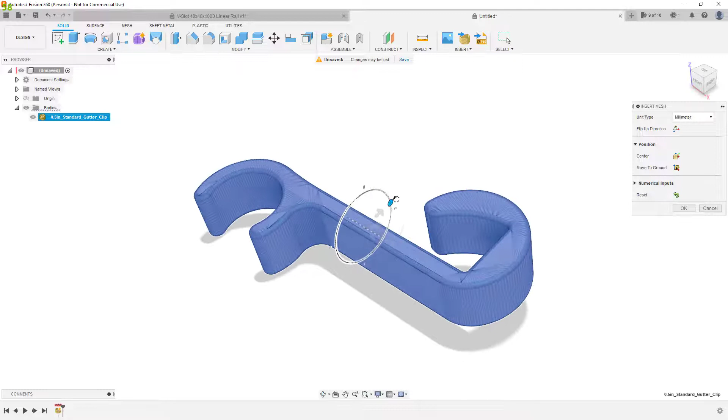Advanced tip, we're going to CNC this, so I'm just going to lay this flat real quick. Other than that, we don't really need to worry about its orientation.

From here, obviously you've got a bunch of faces, but what I found is that if you go into the mesh tab and generate face groups, select your model and hit OK, it's going to blink for a moment and do its thing. Now we're going to go in and convert it, which is this one here.

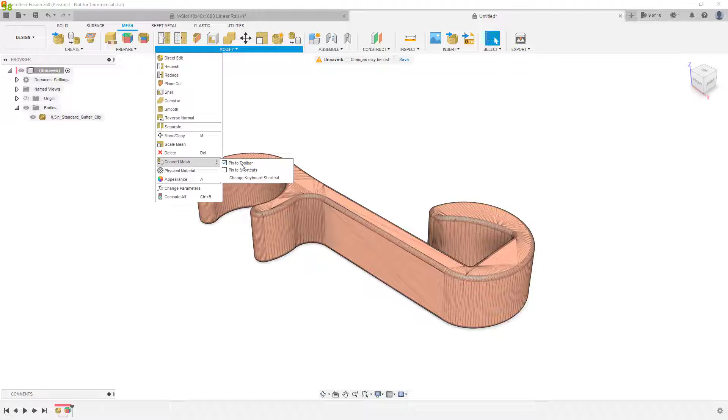Now you might not have convert here. You may have to go down to modify and choose convert mesh, but I use that all the time, so I just hit these three dots and pin it to the toolbar, so it's right here for me. I'll click this one to convert the mesh and accept it.

There's a lot of stuff we could do here, but we don't really care about all those different things. What you really want is to get the profile of this outline. There's many ways to do it, people have all kinds of recommendations, but this is just how I would do it.

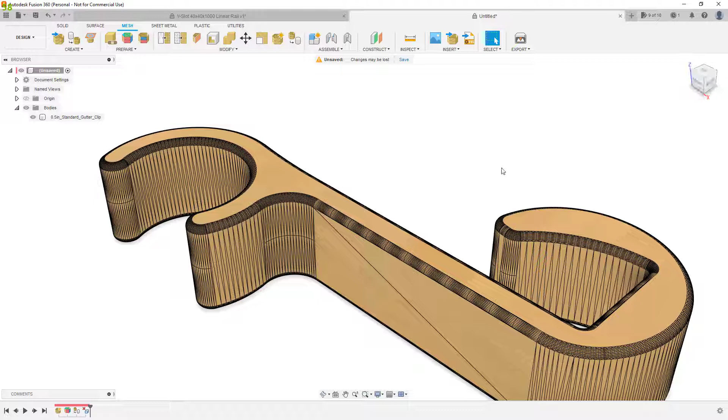Now for me, we are finished with that mesh tab. I could easily get this outline, but I'm assuming you want to identify the actual width of this, which is going to include this little curve here. Like you mentioned, going through deleting all these things is a real pain in the arse.

So what I'll do is I'll go into create an offset plane. Just clicking the button will give you an offset plane. There's all types of planes, but I'll just create an offset plane. Go about here, we're going to go minus about 2 millimeters. That's going to create the offset plane for us now.

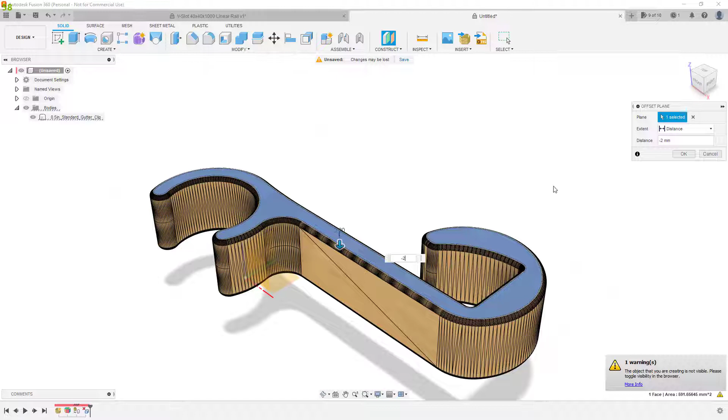I believe the reason you can't see it is because I turned my construction planes off. You probably won't have that issue, but once I'm done with it, I like to turn the eyeball off so I can't see it. But here you have a construction plane, you can see that it is down past those curves.

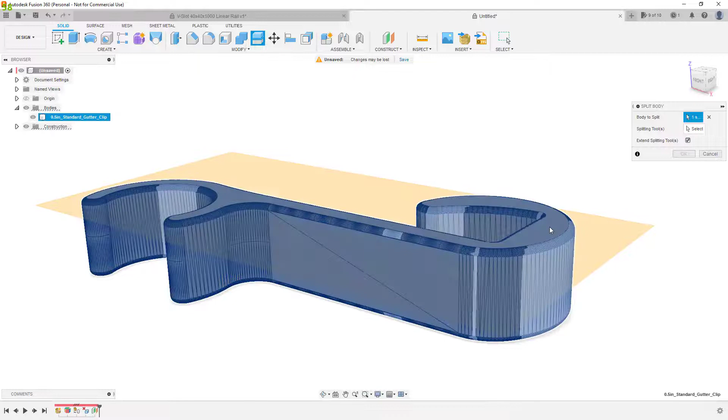At this point, I'll then split the body. So I'm going to choose split body, pick the body that I want to split, and then pick my splitting tool, which is that offset plane, and we have our next step.

Now this is going to create two different pieces because we split the body. I'm going to remove this top piece just to make it easy, and then I'm going to hide this construction plane, and we're left with this piece here.

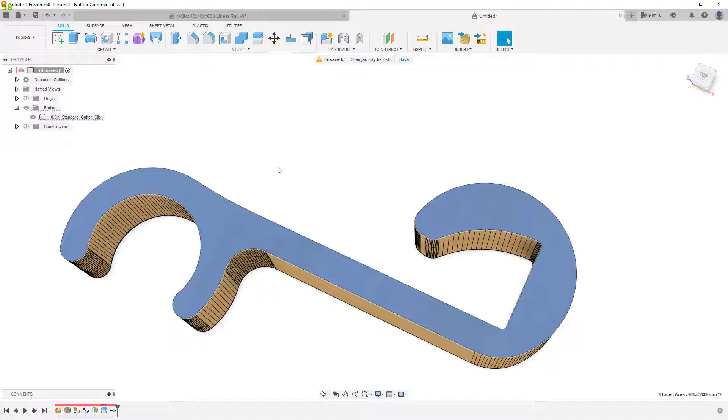Now again, as mentioned, there's 1,000 ways to do it. So how I'm going to do it is just click on this little sketch button here, create sketch, and I'm essentially going to use project.

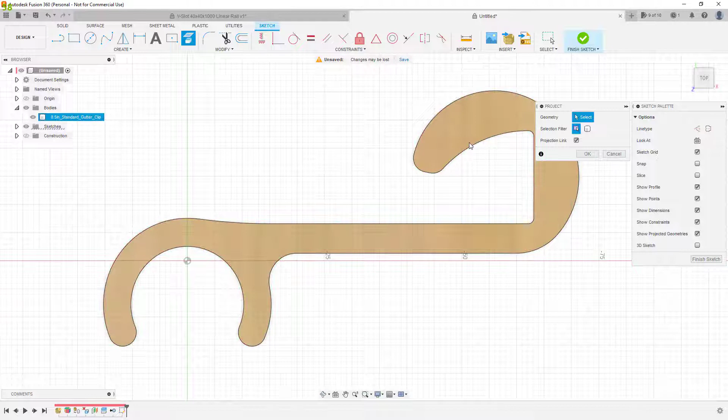Similar, I use project all the time, so you may have to go here to create, choose project, hover, hit the three dots and pin it to the toolbar, but mine's here. I can click an individual line to project that line, but I want to project the entire outline, so I'm just going to click in the middle here, and we'll say okay.

We'll finish that sketch, and now if we hide the body, we are left with just our sketch, and we have the appropriate outline, if you will. Now from here, because it's Fusion 360, you want to have essentially a 3D model.

The SVG is good for other things, and hey, maybe SVG DXF files work in Fusion 360, but I just don't know that, so that's not the route that I go.

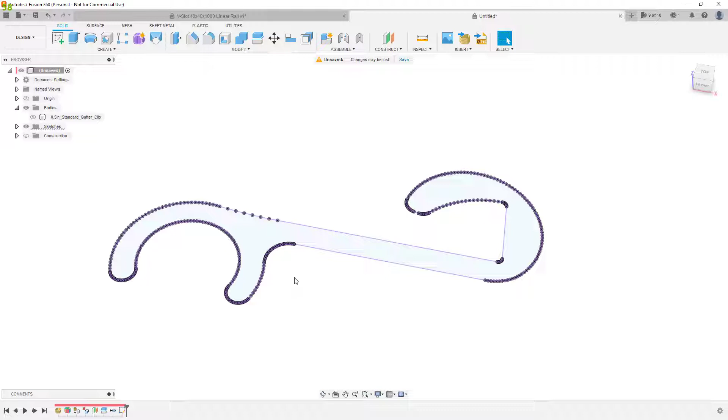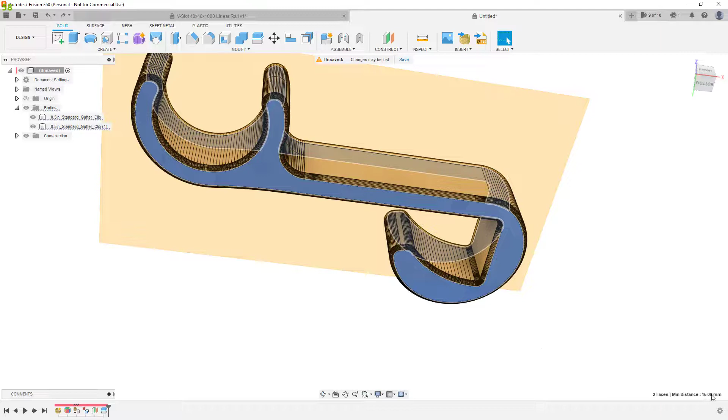I usually use a 3D model to get my heights and other things set. Now that I have my outline, I'm going to extrude this to the thickness of my final part. When I did a test earlier, before splitting this, I selected the top surface, held Control, clicked the bottom surface, and it gave me 15 millimeters as my total thickness. So I'll redo those steps to get back to where we were, and extrude this 15 millimeters, which gives us the body we're looking for without the curves. There are many ways to do this, but this is the easiest and fastest for me.

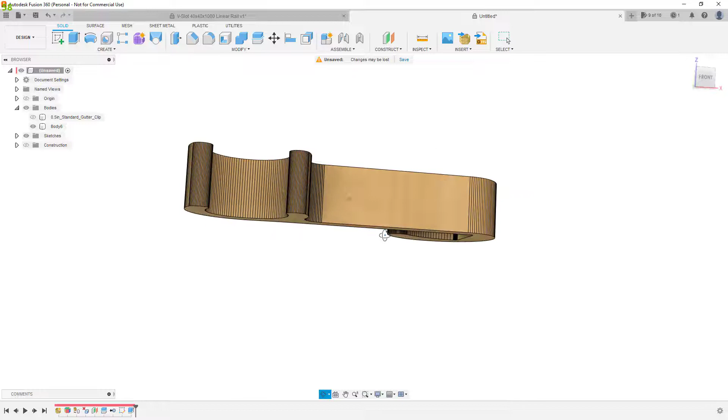So we have our 3D model here. It is laying flat, and we don't have those curved edges, so we're ready to move on to the manufacture workspace. We'll go into manufacture.

The first thing you always have to do is the setup. I've already done this here, so I'll click on setup. You don't have to select a machine, but I went in and added some parameters for my machine, so I'll select that. The box point for my machine is the lower right-hand corner, so I'll choose that. You probably default to the lower left-hand corner for most setups, but I'll use lower right-hand corner for this example.

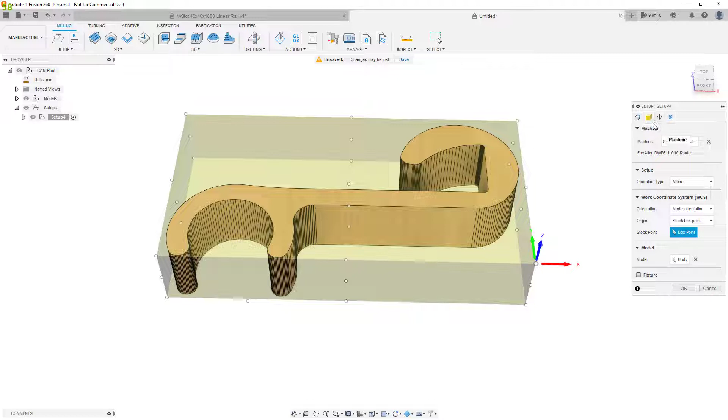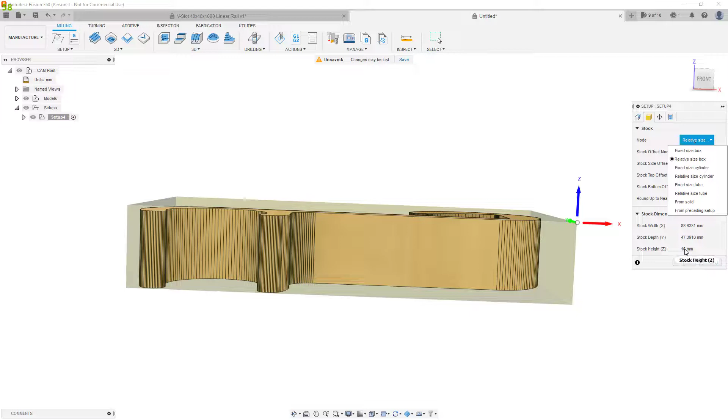Then we'll go into the stock. The stock by default always tries to choose this relative size, which is great for some things, but for me it's not quite what I want. You can see this is a little thicker than our model, right? We have a 15 millimeter model, and theoretically the material we're going to use is also 15 millimeters, so I don't want this 16 millimeters that it chose.

So I'll change this to fixed. Let's say I'm cutting this out of wood, and my piece of wood is 100 millimeters by 100 millimeters. That's my piece of wood there, and it's actually 15 millimeters thick, so I'll set that. You'll see the thickness matches, and the length and width match as well.

Now you see the model is in the center, which may or may not be what you need. If you're trying to save space, you might reconsider. Here you have the model position, and it's always going to be centered because that's what's chosen. Z doesn't matter since it matches the exact thickness of the material, so that's not going to be an issue.

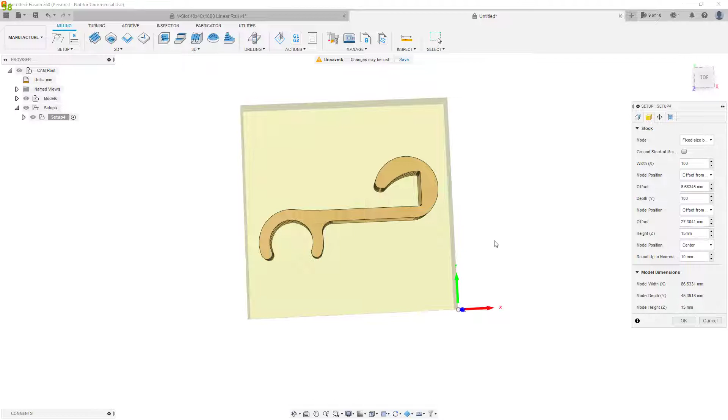For the X and Y offsets, personally I like to go with X plus and Y minus. You can see they're still centered, at 6.6 and 27.3. Now if we take this to 0, it pushes the model all the way to the right side of the stock. And if we put this to 0, it pushes it all the way to the bottom of the stock.

So here I have this remaining stock left. You obviously want to worry about clamps and the thickness of your bit. Typically I don't have this at 0, I have it between 3 and 4. The bit I typically use for these types of things is 3 millimeters thick. I have a couple clamps, so I like to have a little offset off the sides there. That's what I've done.

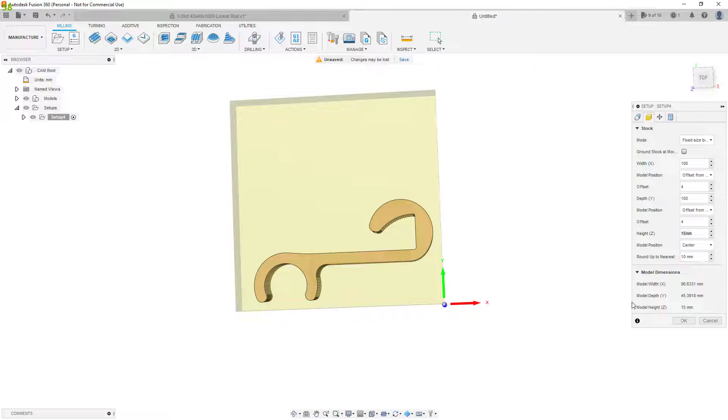Now from here, we're ready to just hit OK. That is our setup. We have determined our stock piece and the position of our model within that stock piece.

This is a pretty straightforward example, so I'm just going to go up here to this 2D contour. We'll select the bottom contour here, and go in and select a tool. I won't go too far into this, but I do use the Amana and the SpeTool databases. There's obviously a lot of tools in both of them.

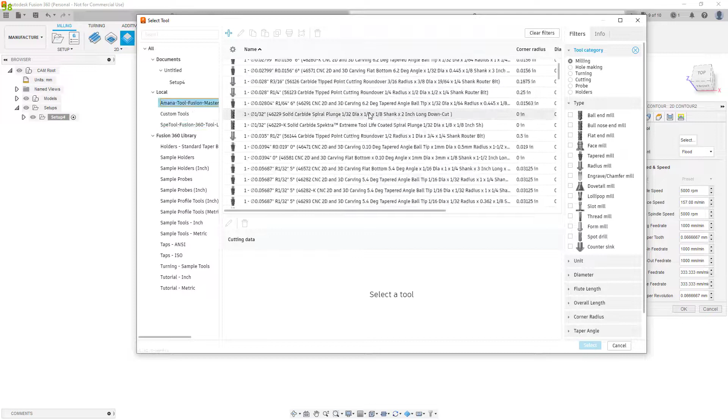Once I find the tool that I've purchased, searching by the number or what have you, I'll copy that tool. Then I'll come over here into my custom tool database that I created. These are essentially all the bits that I own. I don't own the rest of them, so I don't really want access to them, plus it takes forever to find what I need. So now that I've copied that bit from one of the other databases, I'll come to my custom tool database and paste that tool.

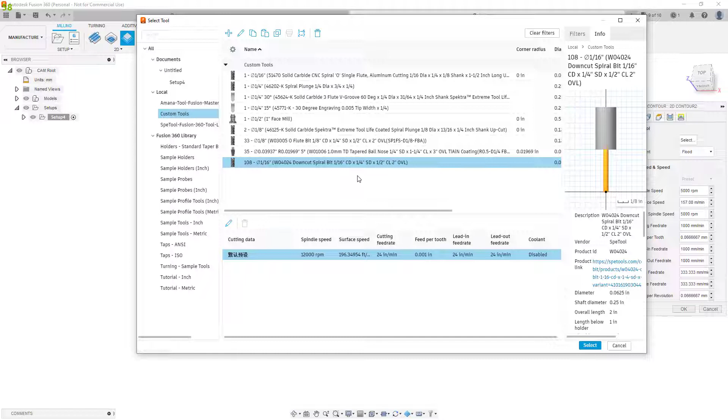And of course, I don't know which one it was. Must be this one here. I don't know, let's undo that. Which one did I copy? Gosh dang it, I'll play the video back, but let's just say it was this one that I copied and I'm not familiar with it. I'll go ahead and double click on it, and it is going to make that selection for me.

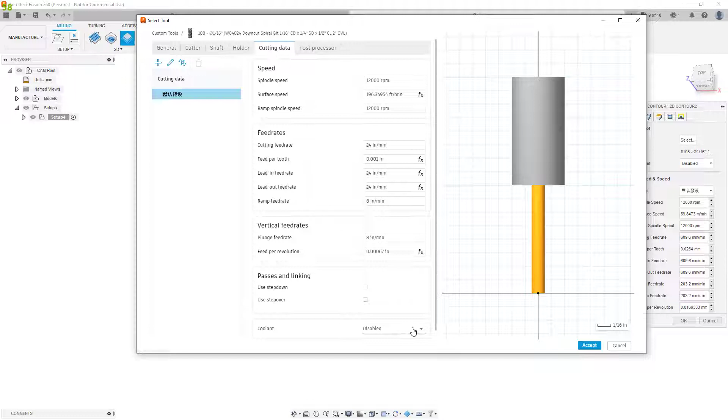Now this one actually I've already customized because the coolant is disabled. Let me show you here. Let's say that the coolant is not disabled. I'm going to right click, and actually I'll go to my custom tool first. I'm going to right click and go to edit tool. Then here you have your cutting data. This is generally set to flood by default, but I always change it to disabled. That way it just turns it off on this side as well.

All right, so you make your selection of your tool, whatever tool you want, just make sure you turn your coolant off, select your tool. We have our contours that we selected. Depending on what you're doing, you may consider adding some tabs. Tabs by distance, we'll just throw a bunch of tabs on here, which is great.

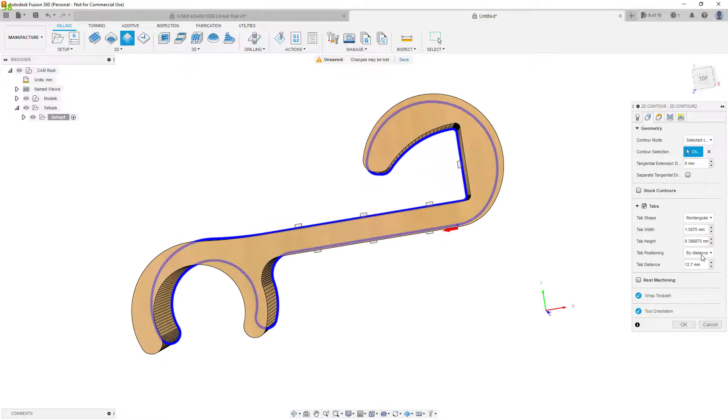It's fine, but I personally like to set my tabs, so I'll change this to 'at points,' and then I'll strategically place them where I think I need them based off of X, Y, and Z criteria. You're going to have to sand these off, so you want to think about whatever surface they're on—sanding them off is going to make that surface somewhat imperfect, so just something to consider.

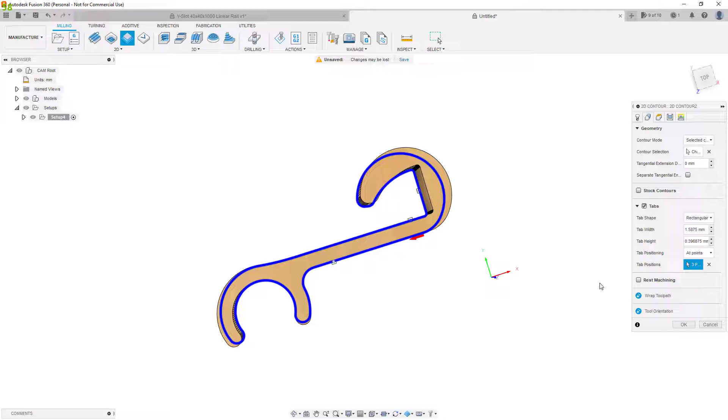You can set the thickness and the height of the tabs here. Right now you can see they're only set to 0.3, almost 0.4 millimeters. I can make them 1 millimeter, I can make them wider, I can make them 4 millimeters wide. You can kind of set up how you want them, you can make them triangles if that's going to be a little easier for you. Just depends on your needs.

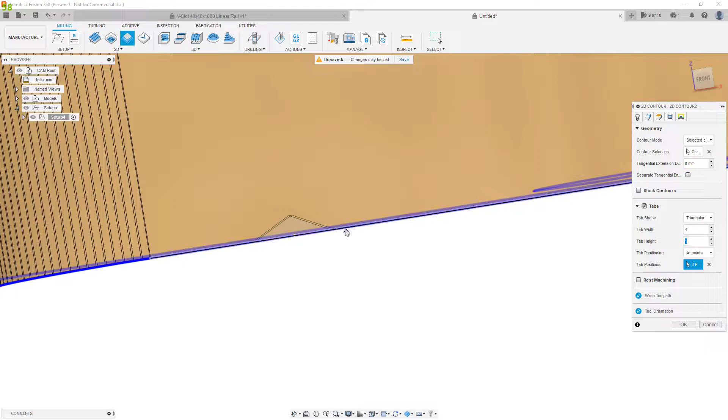Now, notice that the tab height is 1 millimeter. That's currently going off of the stock bottom, so when we go to the height tab here, we have a couple things to choose. The first thing I'm going to address is the stock bottom. I'm going to make the stock height, or bottom height, reference the stock bottom, and that's just going to move that down. It's going to say, okay, I was referencing the top—well, now I understand that the bottom is 15 millimeters from the top.

Well, if your machine is perfectly tuned and it's a beast, then that's probably going to work for you. My machine is fairly well tuned, but I always find that I need to make a couple extra passes to get it to finally and truly cut out. So what I'll do is I'll actually set this bottom height—it's initially referencing the bottom stock, which is minus 15 from the top, and I'm just going to say I want you to go down another millimeter. That way, when you cut, I want you to cut a millimeter deeper than the model.

So any sort of imperfections in my bed—maybe one side is a little bit higher than the other—so one side is completely carved out, but on the back side there's a little bit of material left. Doing this will really kind of ensure that it gets cleaned up quite well. Now you run the risk of cutting into your bed, of course, so consider that. Consider your clamps, consider your screws, whatever it is that you're holding, whatever it is you're cutting on. So for a simple MDF bed, this is really no issue.

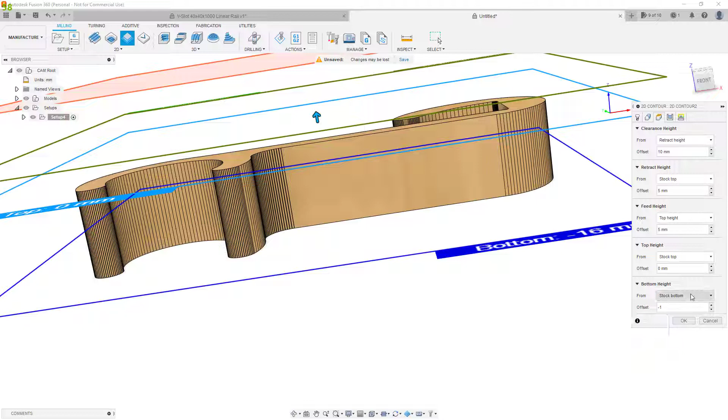So after we have done our heights, or excuse me, the bottom height, we can look at the rest of the stuff here.

Top height, you can see, is just saying here's the top of my model, here's the bottom of my model, based off of how I set it. It's actually 1 millimeter lower than the actual model itself.

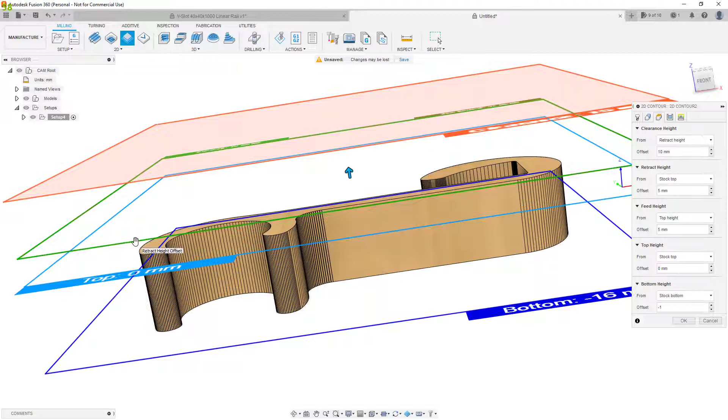Here is my feed height, so really like where it's going to start its process, kind of going into the model.

And then you have your clearance height, which is set off of your retract height. This is just saying that for each move, so after let's say that I do 15 passes to cut this thing out, well, after each pass, I'm going to move myself up to the clearance height, and then I'm going to come back down.

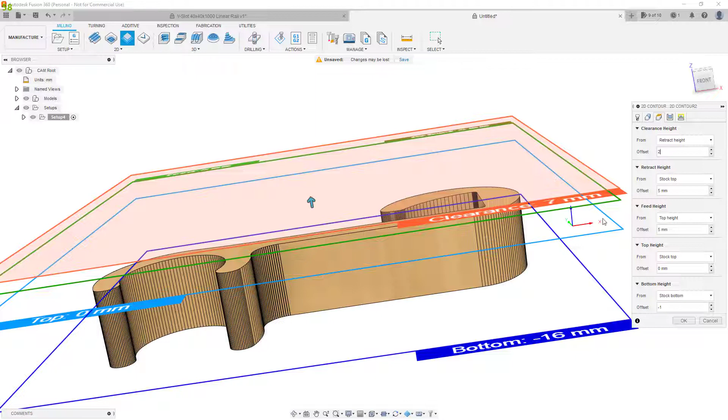I usually just set this to 2. I don't usually use thick clamps, so keep that in mind. Obviously, the higher this is, the more movement the Z is going to make, the more time it's going to take overall. So I usually set this to about 2, which gives me about 7, because it's referencing the retract height.

So all that said, just 2, 5, 5, and then -1 is typically what I'll do here. Then we're going to go into our passes. Many things you can do, but again, keep it simple. I just click multiple depths and I choose what do I want each pass to cut. Whatever size bit you're using, however fast you're going to go, whatever these parameters are will determine how deep you can cut, these types of things.

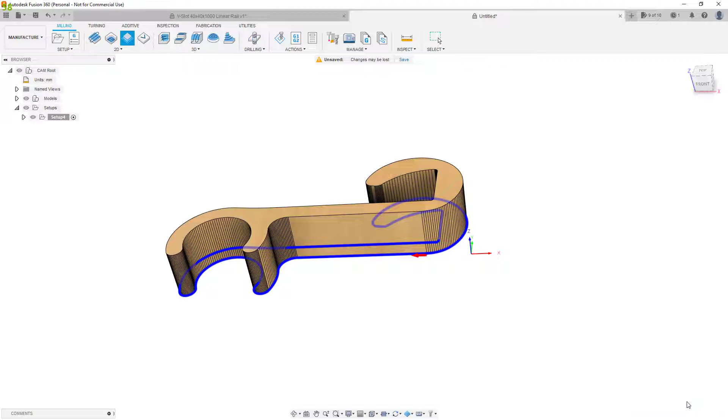So let's say we just wanted to cut 1 millimeter passes, so each pass is going to be 1 millimeter. Obviously it's going to take about 15 passes, right, because it's 15 millimeters thick, and actually 16 passes because we added that extra millimeter there. So we'll say 1 millimeter passes, and you can see that it's going to generate our toolpath here. And if we go through and we count those, we'll see that there's about 16 of them there.

And that's really it, right? So we did our setup. We then chose our contour, and in the contour we specified not only the tool that we're going to use, here's the parameters of the tool, how fast it's going to spin, the plunge rate, and all these things. We chose the contour that we're going to cut.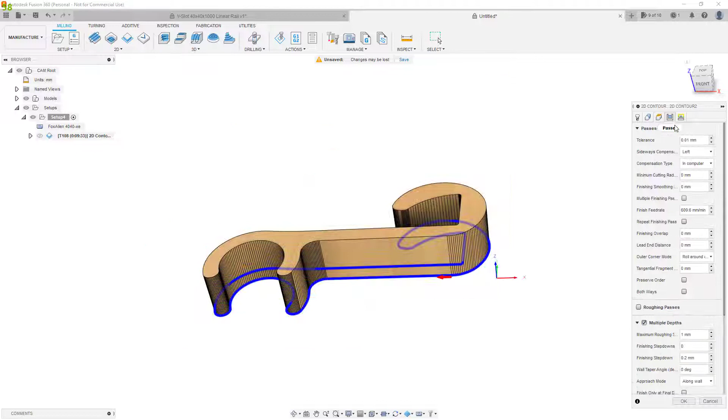We placed some tabs strategically, and we kind of make them meet our needs. We adjusted our bottom so it'll cut all the way through, and to save a little bit of time I made the clearance height just 2 millimeters above the retract height, and then we went in and chose some multiple depths.

Now one thing I'm just thinking about here is because we made this bottom height 1 millimeter, minus 1 millimeter, it's actually going to affect our tabs here. You'll notice that our tabs actually move down as well 1 millimeter because it's referencing the bottom of that model. So for this to work, we're going to have to compensate for that.

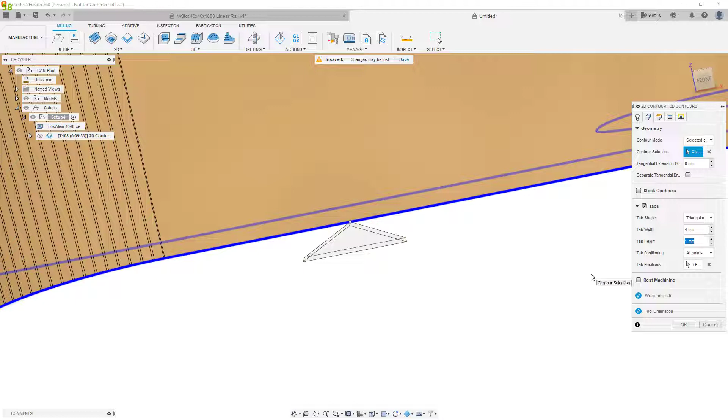So a simple compensation would be just 2 millimeters, right? We might even go back to a rectangle here, just depends on what you need. You may go 3 millimeters. That's actually only going to be 2 millimeters of the model because one of those millimeters is really going to be basically invisible. It's not going to exist, right?

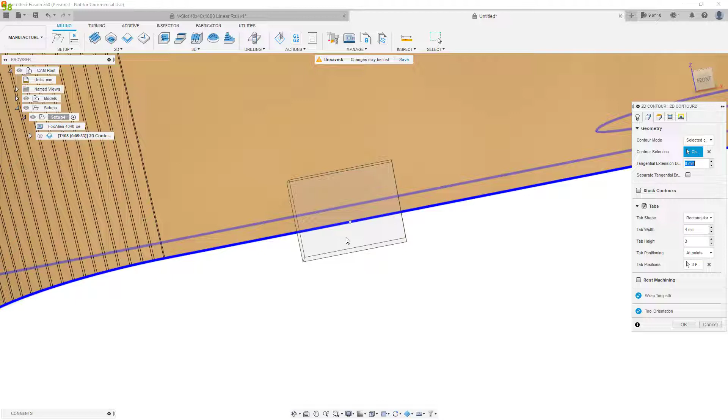Because this is your work bed, your working surface. So just consider that, play around with that. We'll just hit OK again, and there we have it. There is our setup with our tool path.

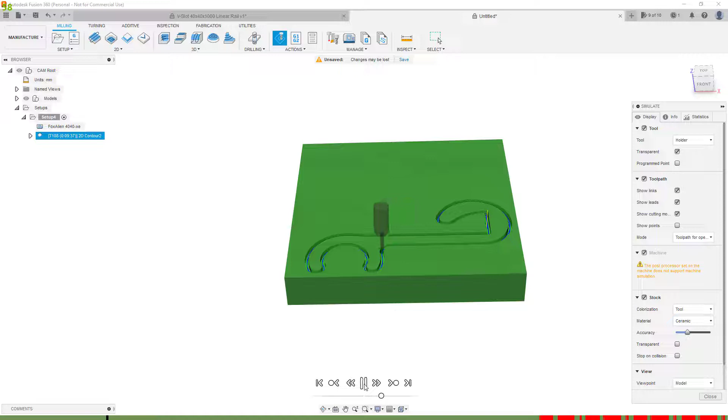With all that said and done, I'm just going to hit this simulate button here, and I'll turn it down a little bit, and I'll hit play. And you can see it goes through, and everything's nice and good until we get towards the end. This bit's not long enough, so you may choose a more appropriate bit.

This speed here is just the speed of the simulation. It's not going to make it go that fast, just how fast you want it to get through the simulation. Sometimes you want to go really slow so you can kind of see what's what.

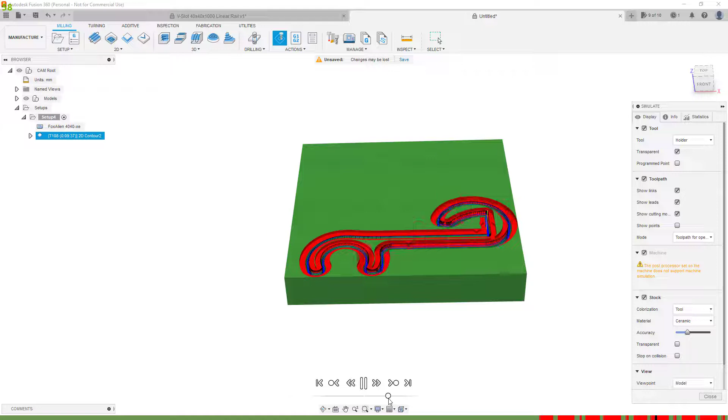Here you can see that it's colliding, and it's going to collide quite a bit. In order for that not to happen, just choose the right bit with the appropriate properties. And that's it, man. That's kind of real quick and dirty. I hope that helps.